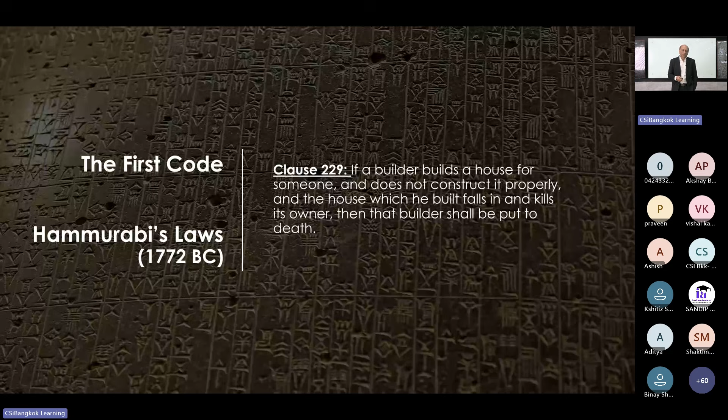As you can see, this is highly performance oriented. There is no excuse in this one - no excuse for design fault, no excuse for following the code, no excuse for construction fault. It's straightforward: performance, and performance not being met, and then the consequences. Of course these days we have better rules, luckily for structural engineers, but the concept is the same.

The reason we make a structure safe, we need to understand very well why a safe structure is essential. Of course we talk about the house not falling, but it's much more than that, because basically we are trying to prevent disasters from happening. Disasters are a combination of three important parameters or concepts: hazard, vulnerability, and exposure.

Hazard is what comes from nature or even man-made causes, and we have little control over that. Exposure is how many people will be affected, how many properties will be affected, what kind of industry might be affected - so that's the exposure, what is around that. For example, if an earthquake comes in a desert, it doesn't really matter how severe it is, because there's no exposure to anything.

But the important thing is vulnerability, which is the inappropriate built environment or the lack of resources for communities. Both of these are vulnerabilities: one is that the built environment isn't good enough, the second is that the community itself is weak and doesn't have the resources to do anything about the hazard. Once we combine these, this is the risk. So we are trying to reduce the risk, and because we cannot manage the hazard, we need to manage the...

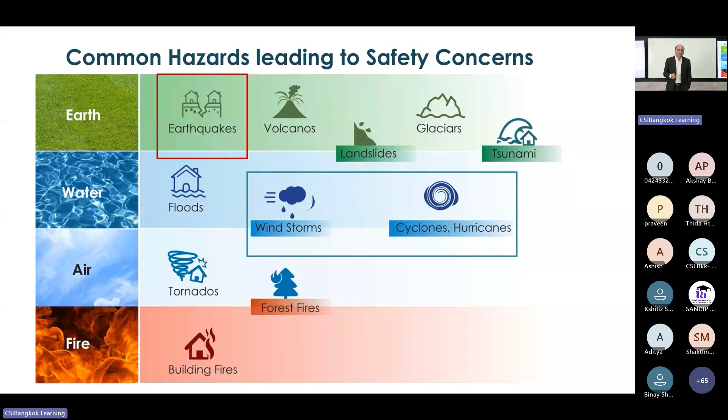So we're back. What I was saying was that we are going to talk about three primary hazards. Earthquake is the main one, and we will also mention wind and cyclones a little bit. Now, the progression of design, if you look at it from history, first of all was intuitive design, which we talked about, when the builder knew everything and the design was based on experience passed from one to the other, and no real computations were possible at that time, long before math and physics were developed. But then the building codes came in about 150 to 200 years ago, when we started to have formal computations or ways to compute structure.

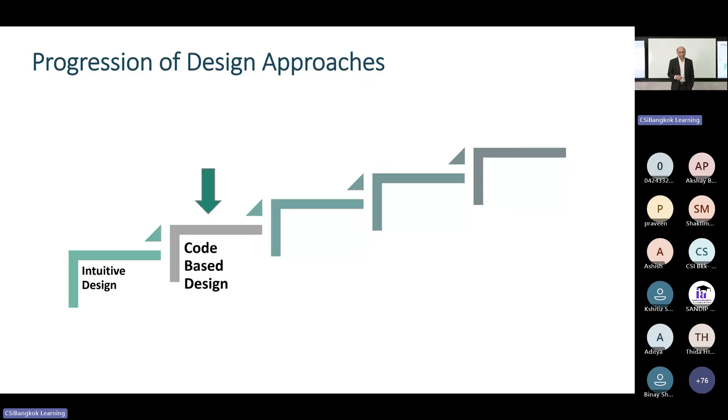As I was saying, the building codes were introduced, and then they started to create rules for designers to use. Now the role of the building code is very clear: they are basically trying to ensure public safety. The reason is because a lot of people are now involved in the building process - there's the architects, structural engineers, contractors, builders, and so many people. So they want to make sure that at least a minimum level of safety is ensured in all structures, because each engineer may have a different level of training. That's the reason to make uniformity and establish minimum standards - building codes are developed. They basically give acceptable solutions, prescribe the details, how to use those rules. They also give you exactly what formulas to use and so on, and they impose a lot of limits.

Normally, building codes are developed from research and also from practical application and experience. Now, the intent of the code, or the spirit of the code, is very clear - they want to give safety. The intention is that if you follow the code, you should get a safe structure. Not must, or you will, but you should get - so the intent is to get a safe structure if you follow the code, that's the spirit. But whether we really get a safe structure or not is not verified. After you design, you normally just finish the design and continue, but you never actually know whether the structure you designed will actually be safe or perform as expected. And that's the issue that structural engineers are grappling with.

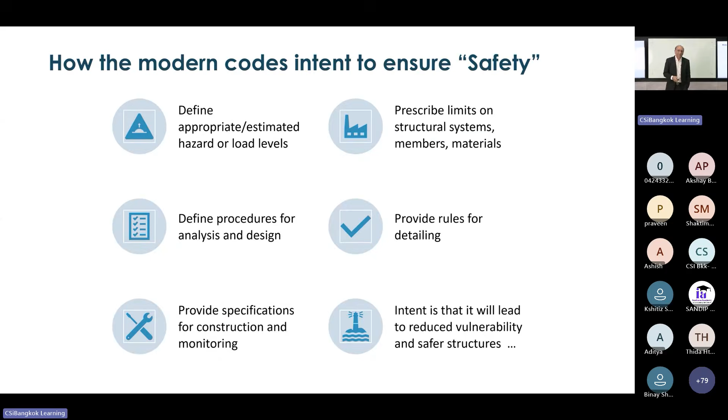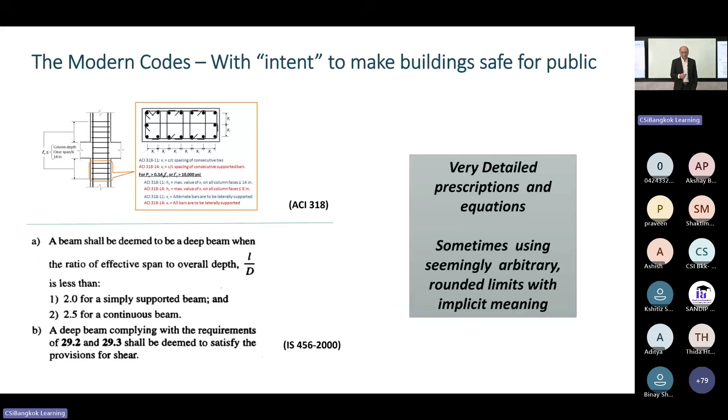Now look, for example, at some of the provisions - you get the limits, the spacing of the bar diameter, spacing of the stirrups, and so on. Very detailed, but very prescriptive. The limits are mostly rounded up, arbitrary limits on everything. But still, the intent is good behind this, although the implementation may have drawbacks. Ultimately, the problem is that engineers shelter behind the codes, because they cannot answer the question that I asked earlier: will the building be safe?

They can only say that I follow the code, but they cannot say that the structure will actually be safe or not, because they haven't checked that particular structure. They have just followed the general procedures for the code, which are maybe developed elsewhere or copied from some other design codes and so on.

So the problem is there are many other questions that the owner may ask. Most of them cannot be explicitly answered because we haven't done the real evaluation, and we will come to that in a minute.

So let's look at the design for safety against seismic effects using the American approach as an example. Other codes are very similar, and see how they handle the earthquake.

So first of all, if you look at normal loading, for example wind, dead load, live load, normally they are estimated and then multiplied by a load factor to bring them to a design level, 1.3 dead load, 1.7 wind, or whatever. So we raise the loads up and bring them to a design level where we think is the yielding point of the structure. Earthquake is opposite.

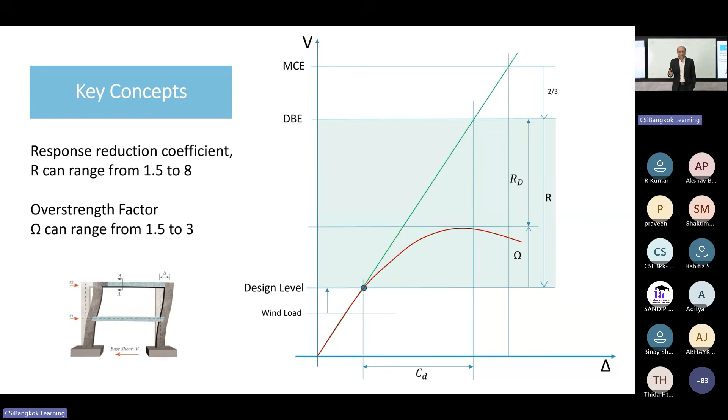But performance-based design does not do this. It takes these factors out and tries to estimate the actual red line.

Once we have done the traditional design based on the factors, then we look at the capacity and demand. For example, for moment, we say that the capacity should be greater than the applied moment with some factor, which in ACI is phi. In other codes, it could be gamma and so on. Then we say this D/C ratio should be less than 1. So the codes are very straightforward: less than 1 is safe, more than 1 is unsafe.

But actually, in a real structure you cannot decide exactly, because the factors vary so much. So this value could be anywhere, and still the structure could be safe or unsafe, depending upon how we choose those factors in the beginning.

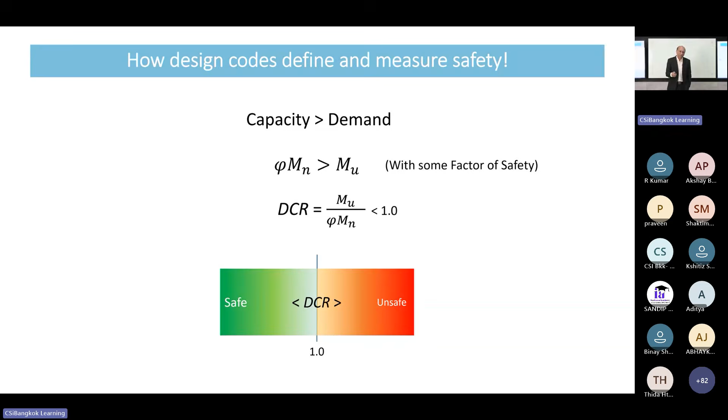As you can see here, to reach the Mu, or the demand, and reach the capacity phi Mn, there are many steps in between which involve so many factors, so many calculations, so many assumptions, before we reach demand over capacity. And that's the way the codes are set up.

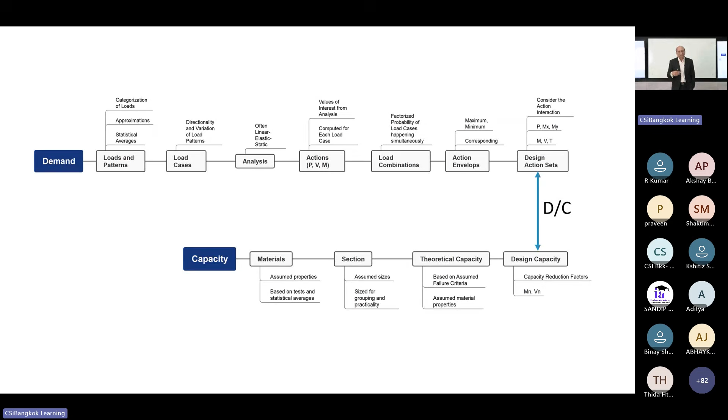We just let the demand and capacity fight with each other, taking everything out. No phi factors, no gamma factors, no omega factors, no R factors.

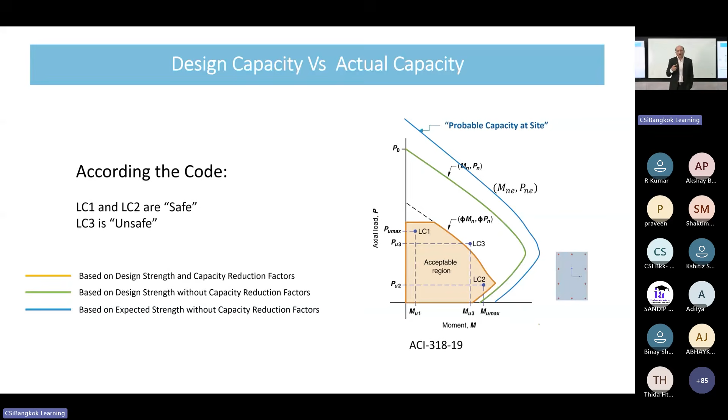Which means that we are away from the probable capacity, far away, but we don't know how far that is. So then comes the performance-based design.

From the code-based design, the next step on the ladder is performance-based design. And I want to make it very clear what is the difference. When I was starting my career, more than 40 some years before, at that time...

When you want to specify the concrete, we used to write the value of cement, sand, and aggregate as 1, 2, 4, and specify in the specification that the contractor will mix the concrete in this way. And then we expect that this will give us a strength of 21 MPa. But once we do this and the contractor follows 1 to 4, the contractor is relieved of responsibility for this strength, because we say just take 1 cement, 2 sand, and 4 aggregate, mix them together, and once he has done that properly, he doesn't care about the strength. We cannot catch him on strength, because that's what we specified.

But these days, we specify concrete based on the required strength, and the contractor or the material supplier or concrete supplier needs to deliver that concrete on site. If they don't deliver that strength, they have to bear the cost. So we have gone from prescriptive to performance in terms of concrete strength definition.

The same thing is happening with the whole of the structure. So now it is more about performance and less about conformance. We say we don't care how you make the concrete, whatever mix you use, it's up to you, just give us the strength. Same is true now for structures: give us the structure which has a certain performance. What factors you use, what material you use, how you do the analysis, what system you use is up to you, kind of. Of course, we don't have that much freedom, but ultimately we are required to prove that the structure is either operational...

...or it can be occupied immediately after the earthquake, or it will be safe after the earthquake, or it might collapse. So we have to work for collapse prevention and immediate occupancy as two levels, and of course life safety is in between. The estimated damage between those varies from 0 to 99% or 100%.

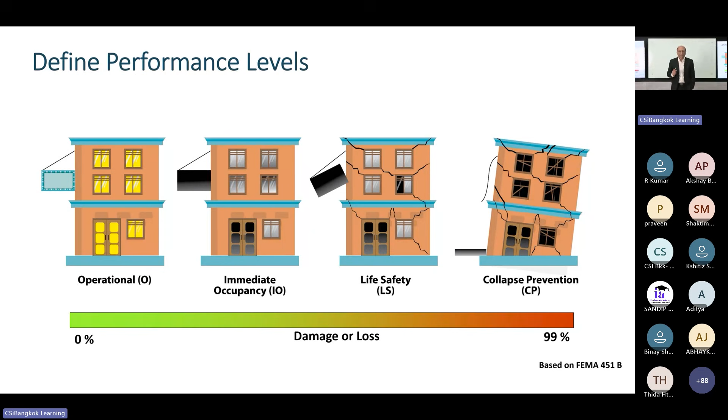And we have seen that a structure can actually collapse fully, as in the recent earthquake in Bangkok, where a building completely collapsed. So we did have complete collapse from an earthquake. It's not unthinkable, it's thinkable for that to happen. And so many buildings collapse, actually.

The second problem is that prescriptive specification constrains innovation, because you cannot innovate if you are supposed to follow the procedure. There's no room for innovation, but performance indicators liberate innovation. You can do whatever you like as long as you meet the required performance. So the codes have this arbitrary implicit design level in between, which is not real, because at this level we don't know what the structure performance is: immediate occupancy or collapse prevention.

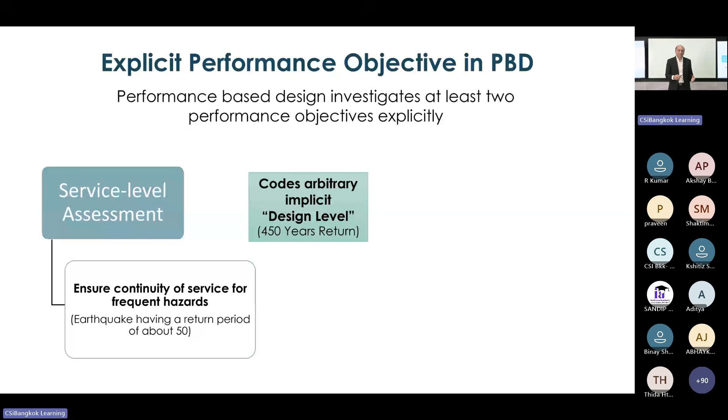So it's somewhere in between. But what we want is that the structure should not crack. It should be completely serviceable for a certain level of earthquake, which is service level assessment, for earthquakes that happen quite often in the life of the structure, 1 or 2 times. And it should not collapse for an earthquake which will happen rarely or in any case. So those are the 2 sides that we should check and confirm explicitly, and that's what performance-based design does.

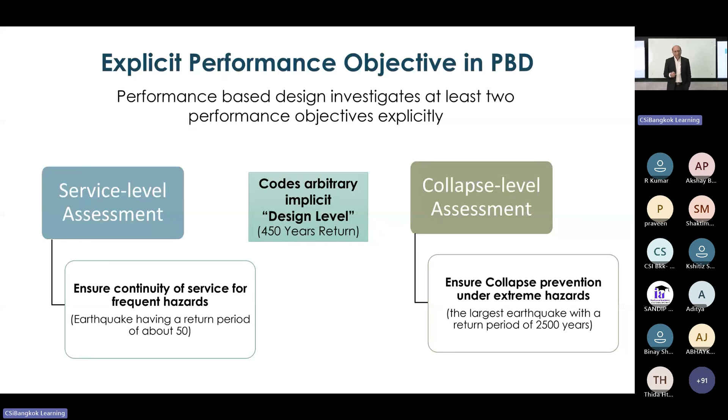So now if we do that, the owner has very clear control. Will the building be safe? Yes, we can tell him, for this earthquake, this level, this system, it will be safe and serviceable. Can I use the building after the hazard? Yes, if the service level performance is satisfied, then for a certain earthquake it will be usable. How much will the repair cost, depending on where we are on that graph I showed you, and how long will it take to repair, we can also estimate. So the engineer can answer most of these questions. That's the idea behind it.

But because the engineer has a lot of freedom, we still need to make sure the engineer is qualified, number one. Secondly, the design is checked, performance is reviewed by somebody who is equal or higher qualification or experience than the engineer. And there are guidelines to follow this process, not codes, but guidelines to help the engineer, because it's complicated stuff.

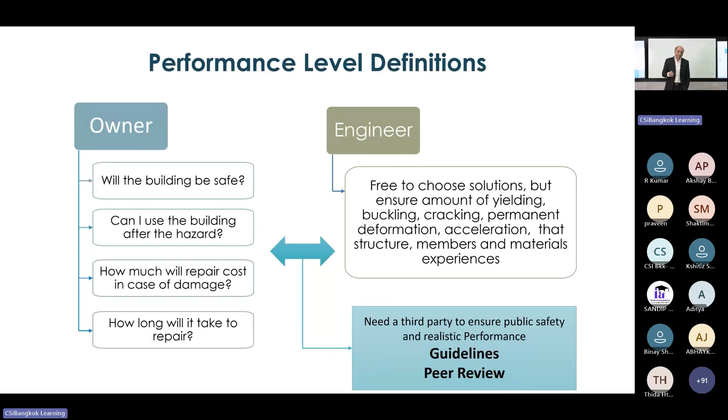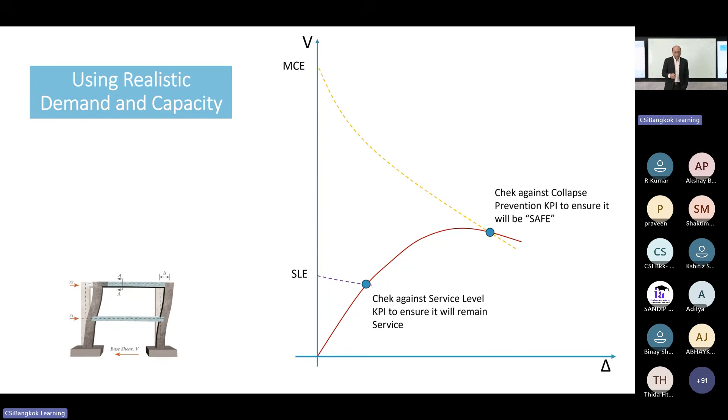So now we just have the red line, the actual performance, and from MCE we directly go to the performance for collapse prevention, and for the service level we go to the performance at the immediate occupancy or no cracking level. So we can just directly go, and all R factors, omega factors, everything is gone. That's how performance-based design is supposed to work if we do it properly.

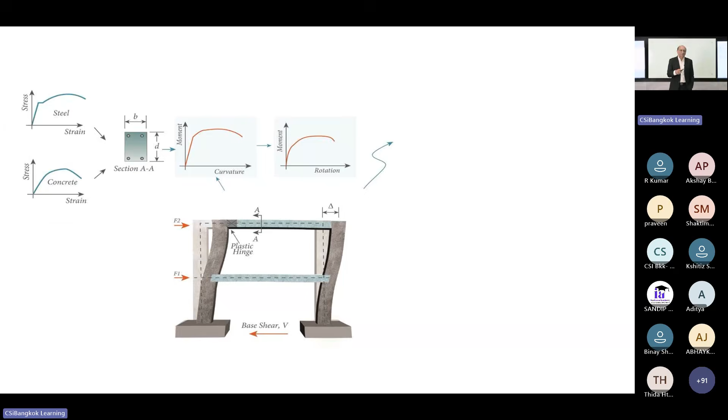And this is the procedure. If I can summarize it very briefly: you take the materials, nonlinear properties of steel and concrete, including confinement and all, you put them in the cross-section, you generate the nonlinear response of the cross-section, like the moment curvature, you convert that into moment rotation, you create the nonlinear hinges or nonlinearities in the structure. Then you determine the realistic site-specific hazard, not the one given by the code, but you actually find out, and I will talk about that in a minute.

You do the nonlinear pushover analysis or nonlinear time history analysis, and then you satisfy the key performance indicators, and then you get a realistic performance evaluation. So that's the overall scheme that we use for performance-based design. Of course the actual one is far more complicated, but the concept is here.

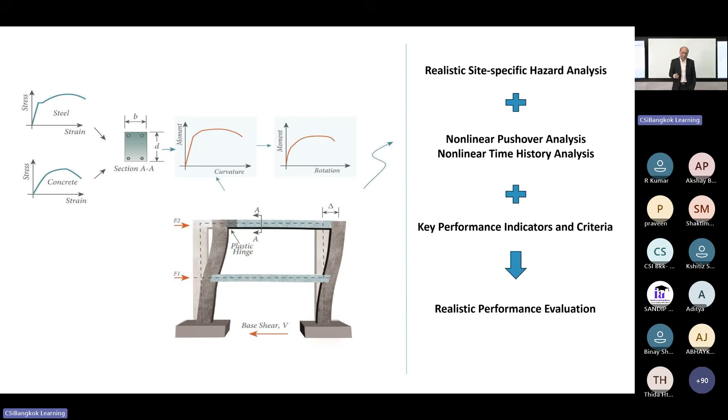And we can do this for a simple frame like this. And then we can plot the hazard and the performance together on one graph, the blue line coming from the performance that we did, and the indicators on the hazard on the vertical side. Then we can see whether the disaster will occur or not, and what will be the level of vulnerability and disaster at different locations of hazard and performance level or displacement. So this is displacement control mostly, plus force control for some components.

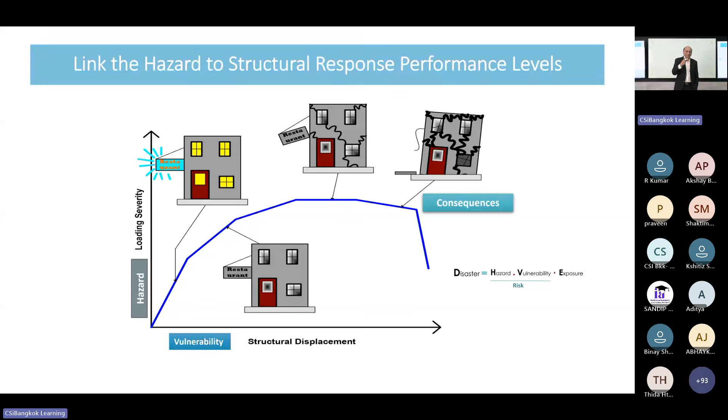Now these are the 10 indicators that we can check, and I will show you how they're checked later: stiffness, stability, strength, deformation, drift, ductility, damage, damping, energy, and acceleration. We check each one of them one by one to ensure they're all okay. Once we have verified them all, we have a lot of information about the structure, and we can answer a lot of questions that code-based design will not answer or may not answer.

So the code is then no longer a shelter, and performance-based design and performance-based evaluation can answer the questions we were asking earlier, because now the engineer has done a detailed nonlinear dynamic analysis with the real material strength, real hazard, with the real structure, removing the factors out of that.

So that's the idea. Let's see what the considerations are for performance-based design, going into the detail. Building codes are prescriptive, and performance-based design has flexibility and innovation. We already talked about how prescriptive codes presume that it will be okay, but performance-based design needs to show that it's okay. There's a big difference between the left-hand and right-hand side.

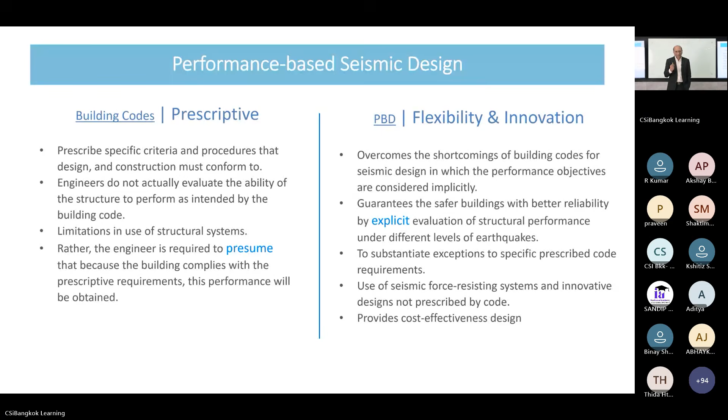This is, for example, a page from the ASCE, which limits the structure types. It says that if you're using a bearing wall system, you can only go up to that height. If you want to go higher, you have to use a system with shear walls and frames coupled together, where frames take 25% of the capacity and shear walls provide 75%. Then you can go higher.

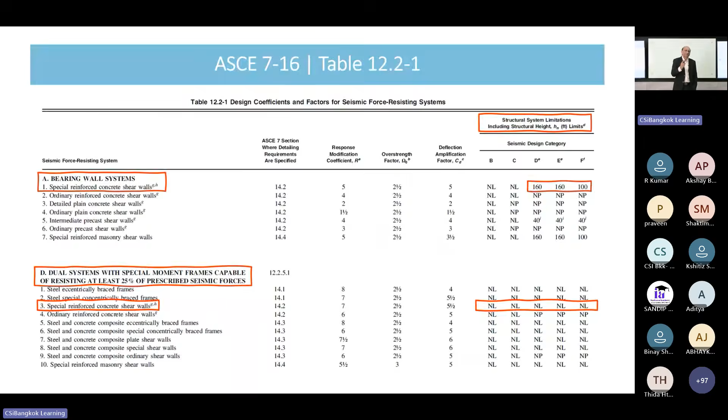So basically, if you are building like this, the code-based design will require that you must have the beams or a frame connecting to the shear walls, carrying at least the capacity to carry 25% of the lateral load. Whether you need it or not, it doesn't matter - you are required to do that. And then the walls should have the capacity for 75%.

In a tall building, this is almost impossible, because in a tall building, the frames have very few columns, very few beams. They don't have the capacity to carry 25% of the lateral load - they only have maybe 5 to 10% or less. But if you want to use the code, then you have to increase everything to follow that requirement.

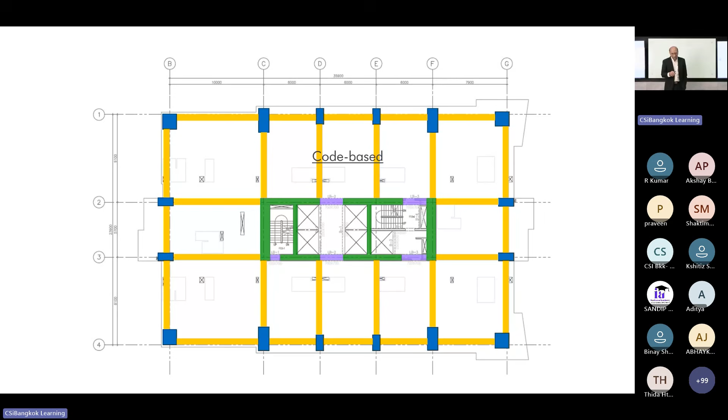But if you use performance-based design, you can just simply use a flat slab, no beams, and say, okay, I'm going to use a core wall, columns, and a flat slab. The core wall can carry all of the loading in this particular case, if we can demonstrate that. That's the advantage of performance-based design, and that's why so many tall buildings these days in earthquake zones are being constructed with only a core wall and no beams or frame.

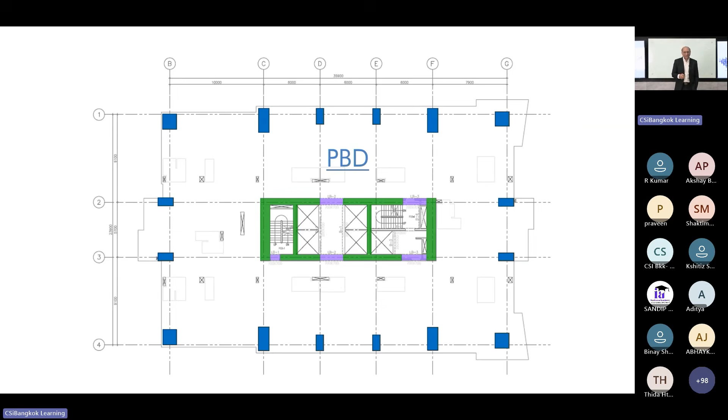So code-based design will require that, and performance-based design can prove that this can work as long as we do the whole thing properly. That's one of the biggest reasons why performance-based design can be used for tall buildings, but for low-rise buildings, similar things can apply.

The other one is the omega. The code requires that some of the important members, like the inclined columns or the diaphragms, must be designed for an omega factor of 2.5 or 3 or whatever - the over-strength factor. That means the forces that you get from linear analysis, you need to multiply by 2.5.

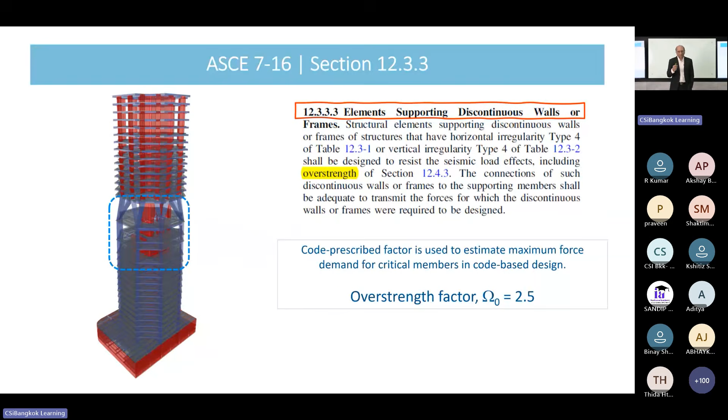But if you use PBD, you don't need these factors. You design them for the actual forces that you obtained through nonlinear analysis. So that's the second one.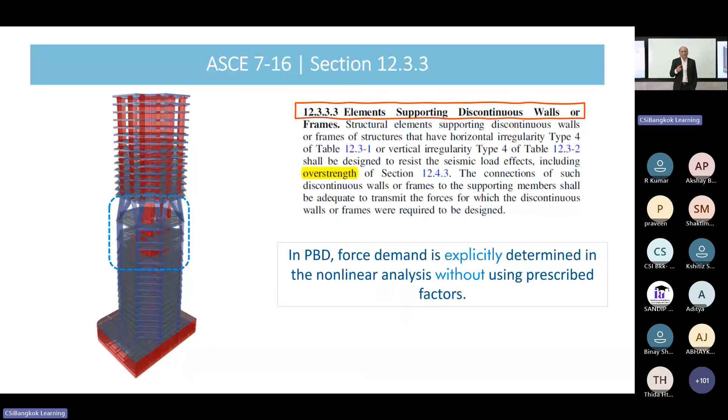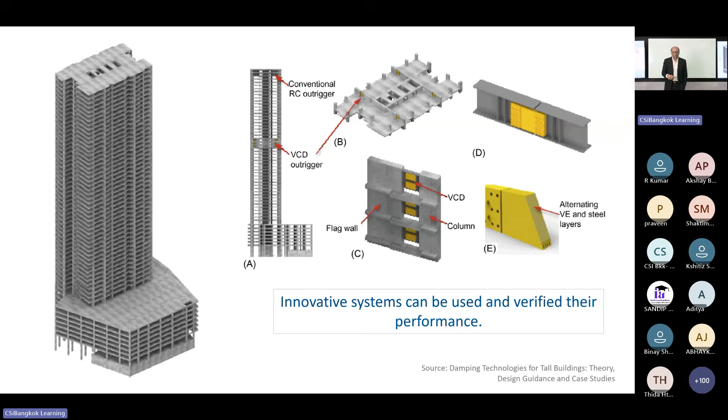The third one is that it allows you to use all kinds of things in the building that the codes do not have any way of handling - for example, dampers or outriggers, BRBs, viscous dampers, and many other things. So we can innovate in the building as long as we can prove that the system will work. That's the key advantage of using performance-based design.

The next very important one is the requirements for confinement and ductility. The codes will require that you confine the walls like this a lot - boundary zones have to be confined all the way, along the full height.

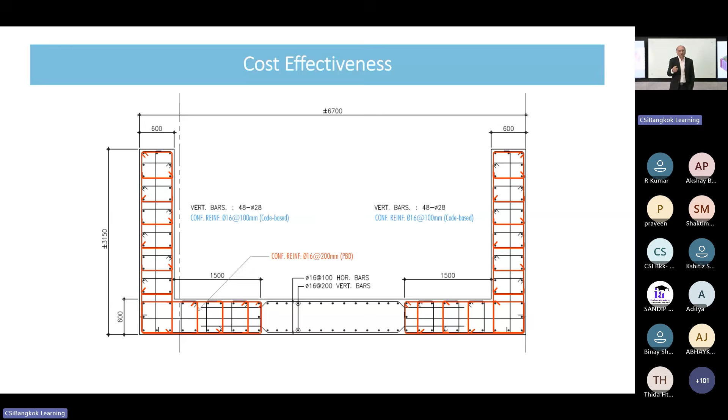But in practice, if you use performance-based design, you can actually reduce the confinement, because you can prove that lower confinement will work. So considerable savings can be done in terms of confinement if we can see that we don't need the full confinement over the whole height, because some locations are not yielding, so confinement is not needed there. That's another big advantage of performance-based design.

So what do we need to do this? First, the basis of design has to be defined. Then the geotechnical investigations have to be done properly, more thoroughly than the normal one. Site-specific hazard has to be determined - we cannot use the map provided by the building codes because you're not using the codes anymore.

Also, wind tunnel testing has to be carried out for tall buildings because wind demand interferes with the seismic design - we will see that in a minute. For low-rise buildings, the last one may not be necessary.

So let's look at the site-specific probabilistic seismic hazard assessment.

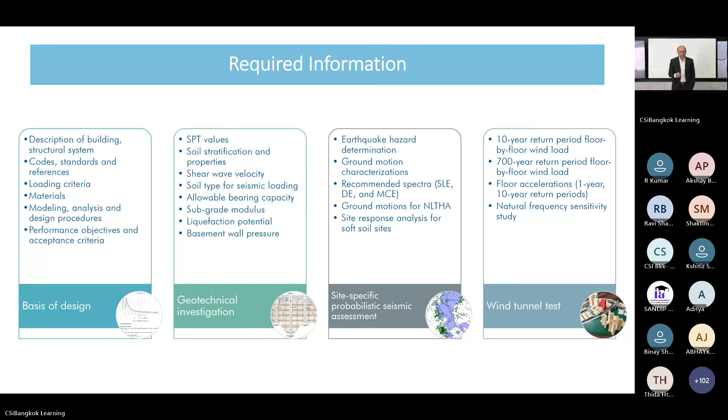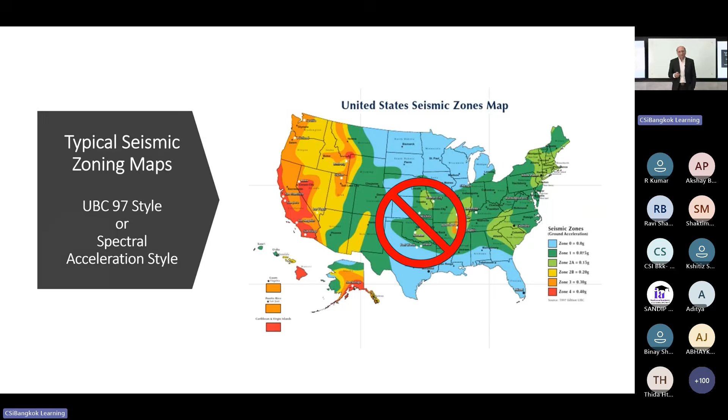So this is a typical zoning map, UBC 97 style, where we have zone 1, zone 2. Of course, they don't use it anymore. They use spectral acceleration, short period, long period. But I'm just giving you an example because many countries still use zoning to define the risk or hazard. This is no longer an acceptable way to do things in performance-based design.

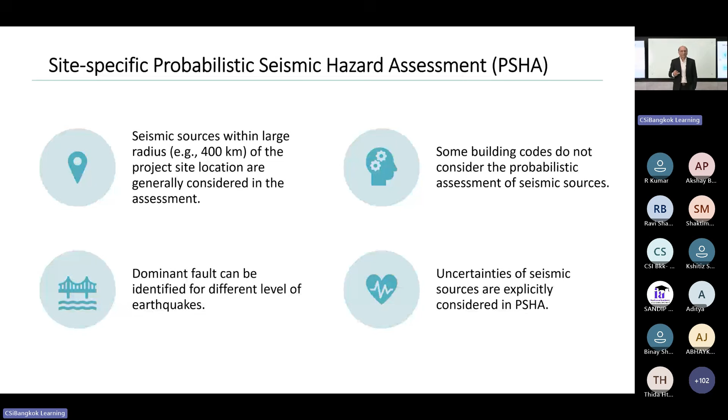For that, we need to actually calculate the expected hazard at that site using all of the faults and sources of seismic excitation, their potential for all of the energy to be released and so on. So the whole analysis is done, and then we also find which is the dominant source, so we can see what is the direction of the fault, because that's also important. Which direction the earthquake is coming and which direction the building will respond.

So after that, we need to get at least 2 levels of response spectra and corresponding time histories. One for the maximum considered earthquake, which is roughly 2,500 years return period, used for collapse prevention performance. And then the service level earthquake, which is a 43-year return period. So if the building's life is 100 years, it might come twice, roughly. And the other one is a very high risk. This one is where the building needs to remain serviceable.

Look at the damping. The design basis earthquake and the design codes normally recommend 5% damping to be used. For SLE, the damping could be as low as 1.6%, because the service level demand is too low, so cracking would not occur. So the building will be in a more or less uncracked state. So the damping will be low.

And for MCE, the damping could be higher, and that varies depending on which specification you use. Sometimes they use 2%, sometimes 5%, and so on. So for service level, the damping is pretty low, and this has a major effect on the demand.

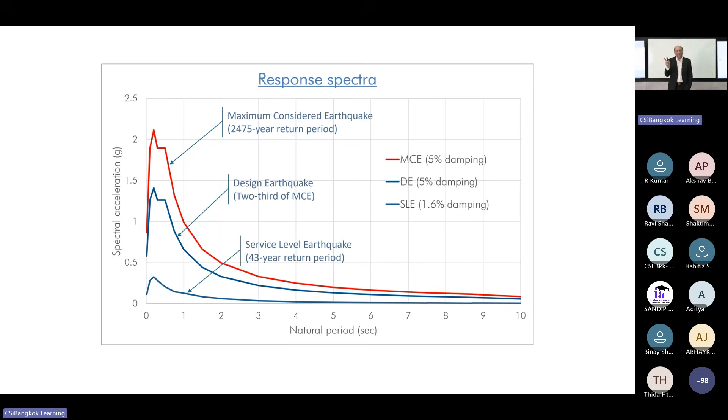And then the fault orientation is important. We design, when we model the buildings in ETABS or any software, we think there's an X and there's a Y. But there is no X and Y marked on the ground. It is our assumption that this is the X direction, this is the Y direction of the building. But in reality, the building will be placed north-south with orientation with respect to north and south. And then the fault will have a certain direction. So seismic demand will come along and across the fault, normal and along.

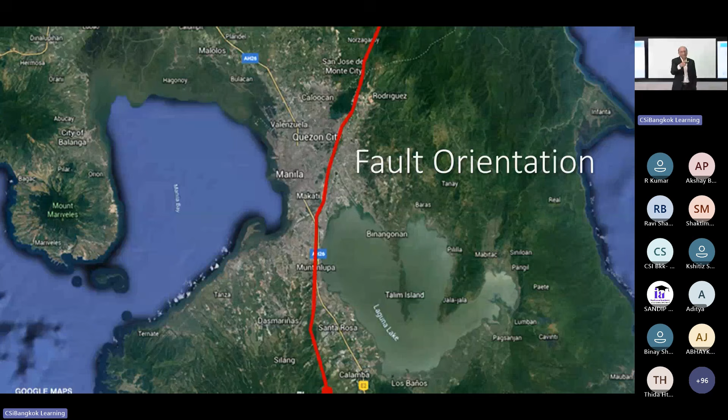So we need to design both for the effect of the earthquake which is along the fault, parallel to the fault, and the effect of the earthquake which is normal to the fault, once we determine the predominant fault. This is in Manila, for example. So if you do that, you'll have to orient the X-Y on your plan or ETABS with the north-south and the fault direction to find the predominant direction on which the building should be, or the seismic demand should be applied, or the hazard should be applied. So you need to input that data into whatever software you're using to make sure that the direction of the earthquake and the direction of the building's principal directions are aligned for normal and along-fault excitations. And this is critical.

Then for level of earthquake, we have the service level earthquake, as I mentioned, and the maximum considered earthquake. For service level earthquake, we check serviceability. Everything must remain elastic with a little bit of minor yielding. For collapse prevention, everything should remain standing with allowed deformation, yielding, lot of damage, but not collapse. Building may not be usable after that, but it must not fall down. So that is controlled by limits on deformations, as well as on shear in certain members.

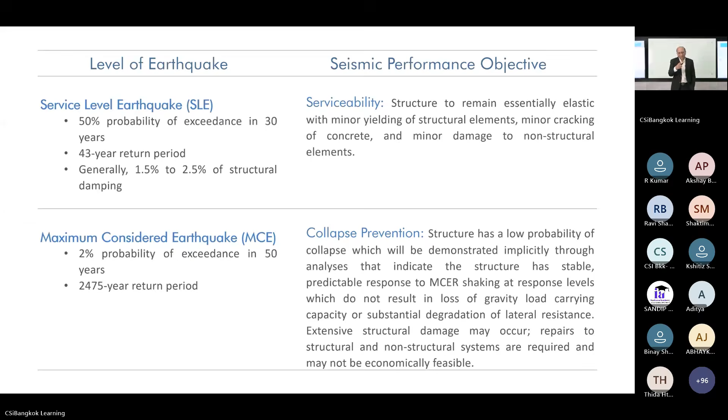So you can see here that the damping is now controlled. Service level damping is controlled. 5% damping is for design level normally. MCE is 2.5 in this case, and then SLE is 1.6. So we control the damping now, different from the code design, because we expect the real structure not to have that much damping, and change of damping, as you know, changes the demand coming to this response spectrum, goes up and down based on that. So these are the critical things, and this depends on the height of the building and so on. It's not a single number that can be used. So this has to be estimated properly.

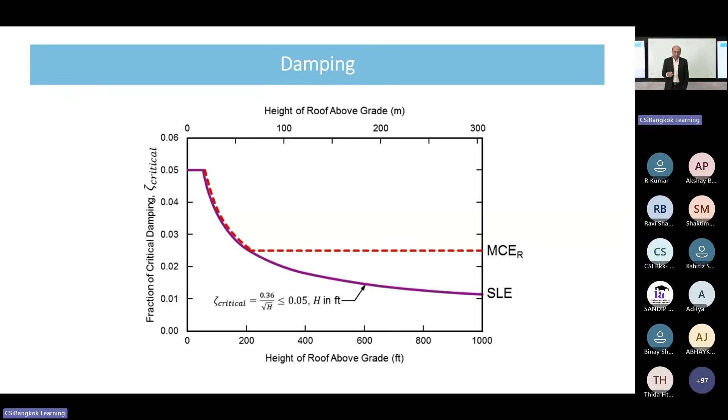So how do we conduct the performance-based design? Many of these slides I have taken from AIT Solutions presentation. Engineer Ong may also be joining today, he will answer some of the questions. A lot of the work is based on buildings which have been evaluated by AIT Solutions at AIT, and we have borrowed some of these slides from them.

So the performance-based design procedure is: geotechnical investigation, probabilistic seismic hazard, then selection of the design, schematic design of what system we are using, then wind tunnel for tall buildings if that is the case, then elastic design for wind, and nonlinear design for earthquake, and also elastic design for service level earthquake. So we can see the whole picture is very clear, and we follow that for doing the complete performance-based design of a building.

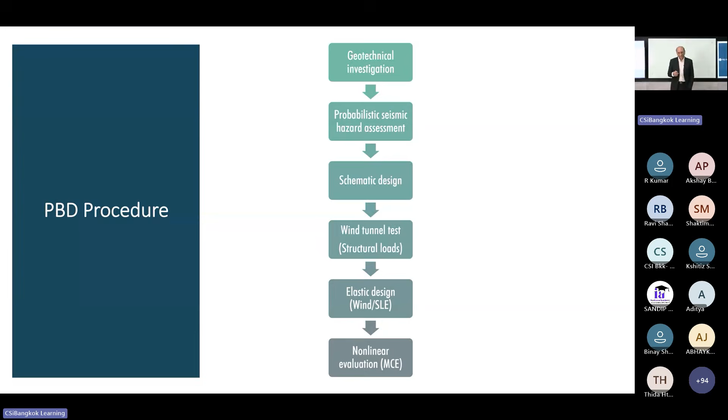Two levels are checked. The design level is not necessary. So for modeling and analysis, for the service level evaluation, we create a linear elastic model. We use response spectrum analysis. We consider critical damping, generally 1.5 to 2.5%, like I showed you, it's a range depending on the building. Load combinations are very clear.

We do not multiply the earthquake anymore because it's already service level actual loading. And then all of the factors, R, omega, and others are taken to be 1, so they are not needed in this analysis.

Acceptance criteria is clear. The DC ratio should be less than 1.5 for deformation control and less than 0.7 for force control, so we don't want any kind of shear failure, axial, or brittle failures. The story drift is limited to less than 0.5%. These are the acceptance criteria to ensure the building will remain serviceable after that service level earthquake, and it can be occupied immediately, so people can leave and come back after the earthquake.

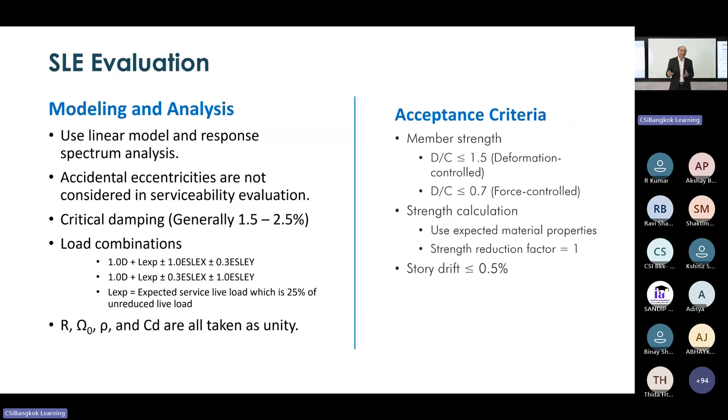The MCE level, however, is more complicated and comprehensive, because we use a nonlinear model and nonlinear response history analysis, either pushover or full nonlinear time history. If you're using response history analysis, you use 11 pairs of ground motion, different, considering various hazard types in terms of near fault, far fault, and so on, so we make sure we consider various types of time history characteristics that could hit the structure.

The damping is less than 2.5%. We take the average of these 11 ground motions to calculate some of the things, and for some we use the average multiplied by a factor.

Then we classify the actions to be either linear or nonlinear. The brittle actions, for example, are expected to remain linear, and the ductile actions are expected to be nonlinear. So we classify them, and this may depend on the guideline that you're using, and may have to be agreed with the people who will review the design and so on. But normally this could be one of the things that we set up.

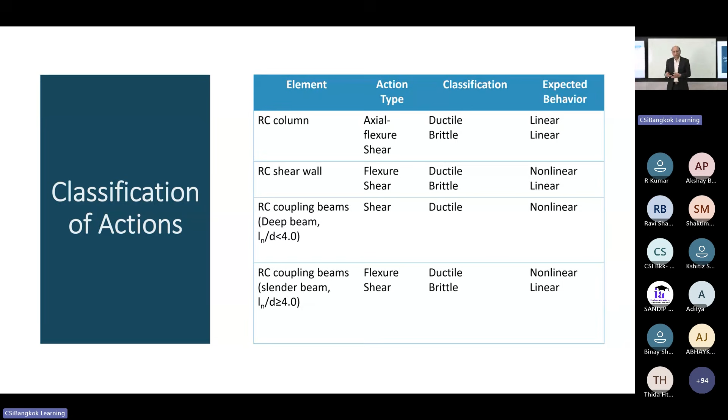As you can see, some things are allowed to be nonlinear, and the limit is on deformation, and things which are brittle, not allowed to be nonlinear, we check the force. So for things which are deformation-controlled, we check the deformation at various performance levels, making sure rotations and deformations are within a certain range specified by the code. For force-controlled elements, we make sure they do not cross their failure point because there's no ductility. Those are the two backbone curves used to control the response or check it after the analysis is complete.

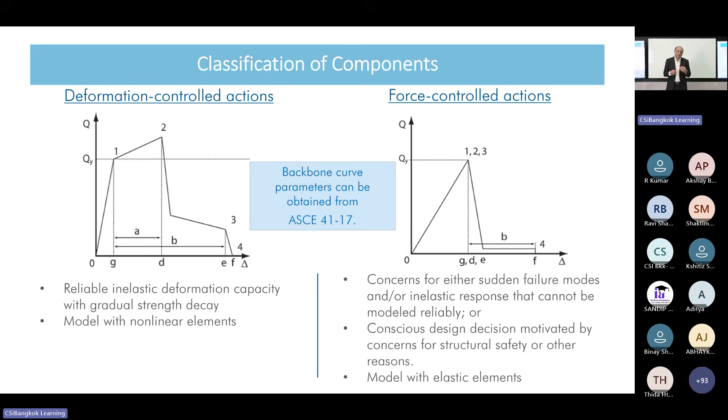Normally, for a nonlinear time history, you will have the stresses, but we use the backbone curve already modified for damage. So we use that modified backbone curve, check the rotation against moment, and make sure it is within the limits.

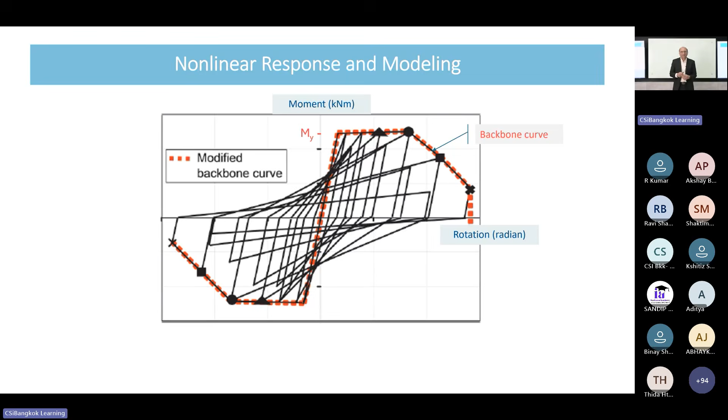Now, in this case, we have to include the confinement effect in the nonlinear modeling. So for the portion which is confined, we use the confined concrete curve, and for the portion which is not confined, like the middle portion of the wall, we use the unconfined curve. So even the outside cover is unconfined and the portion within the zone is confined. We have to do detailed modeling using fiber mesh or nonlinear shell, whichever approach we use - there are many approaches.

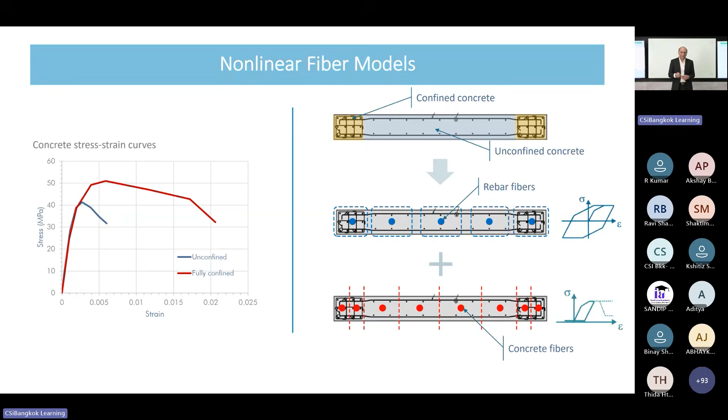We have to make sure we specify the correct model for concrete to take into account the nonlinearities and confinement effects. Once you have done that, we can check the response more reliably. You can see here the response from the two types of concrete.

So demand capacity ratio, there are two types. Like I mentioned, we have the elastic strength and we have the deformation inelastic. So we make sure that the two are satisfied independently of each other. Certain things for brittle, elastic limits, and for deformation limits.

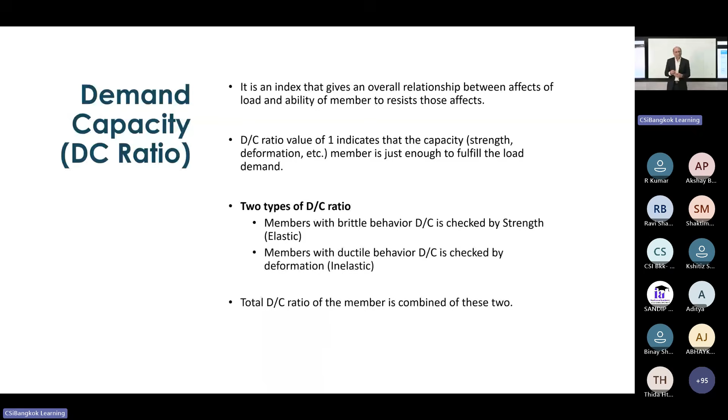And these are the acceptance criteria. For example, for the beams, hinge rotation has to be less than the limit. And then for columns, the axial flexural interaction, hinge rotation less than that limit. Shear DC ratio for strength capacity and beam shear less than the strength capacity.

So like I mentioned, for brittle, we make sure that the strength, we do not have brittle failure. So strength is the primary concern. For flexure, where we have the energy dissipation, where we have the nonlinearity stored, we can allow more deformation.

And same is the case with shear walls. We limit the tensile and compressive strains for the shear walls because the wall is modeled in such a way that your rotation cannot typically be measured. So we check the strains at various locations.

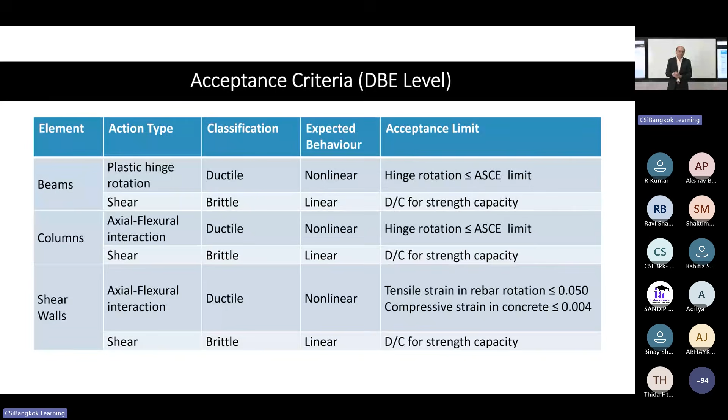And then we have the limits on story drift, 3%, and coupling beams and so on. So it's very important to set this criteria, agree with the client, agree with the guidelines, and agree with the person or engineers who is going to review the design. Everybody has to agree before we do this work.

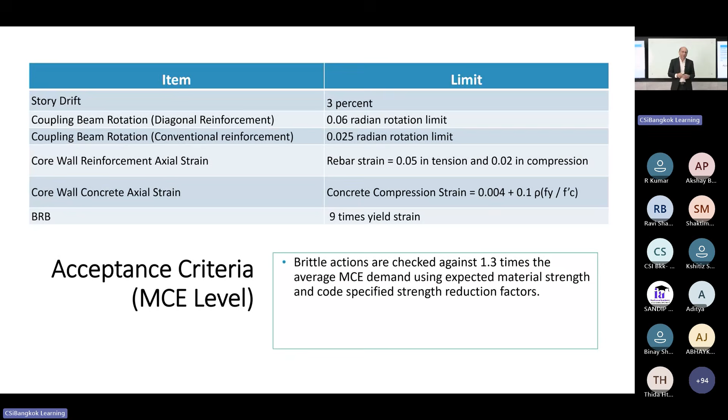Then we look for global and local responses, because now we are doing a very detailed model, very detailed analysis, so we know we have all the information that we need to make the right decision. And that information is a lot: modal analysis, base shear, story shear, building sway and displacement, story drift, shear wall strain, shear wall shear capacity, frame member rotations, and so on.

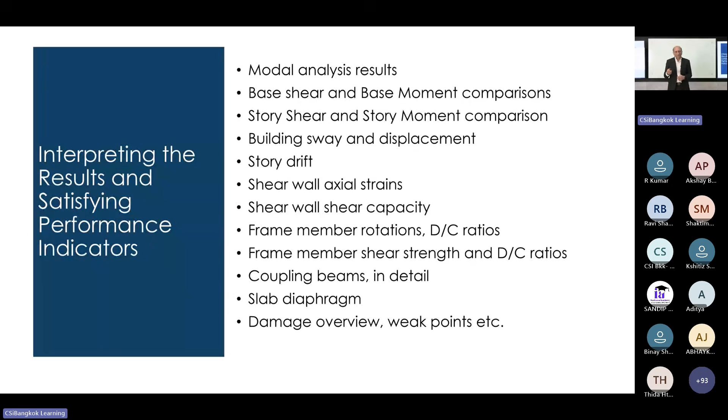So let me see quickly what we can. So first of all, base shear. Very important to check the base shear from different analyses. Normally, when we do the performance phase, we at least have a linear model, response spectrum, and we have a nonlinear model, so we can compare them.

We can also compare the wind demand there. We can also compare maybe pushover. So we can run many analyses on the same model. We can run linear response spectrum, linear time history if you want, nonlinear pushover, and nonlinear time history because the model is the same. And we can get all these base shear and compare them. And the percentage is very important.

And then we look at the transient drift, that means drift which will happen during the earthquake. And we also look at the residual drift, the drift that will be left after the earthquake is over, because the building may not come back to its original state. And that's why the ground motions normally have to run longer than the earthquake duration, to allow the building to come to a standstill.

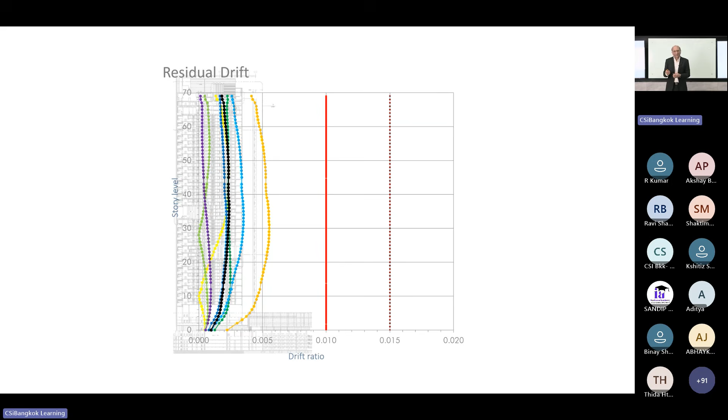So let's say the actual ground motion is 45 seconds. We may run the analysis for 2 minutes or so until the building comes to a stop, and then see what is the drift at that last point. So we check both the drifts. We look at the lateral displacements. We look at the floor acceleration, which is very important.

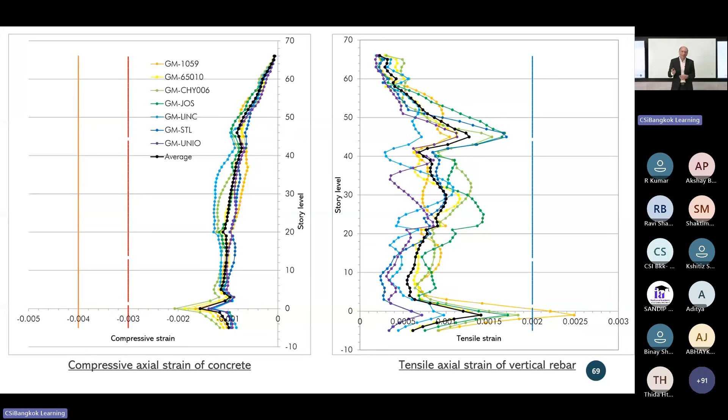We look at the strains in the wall, at different points, different ground motions, at all locations in the wall, compressive strain and tensile strain, to be within the limit. We allow some tensile strain to yield, but compressive strain should never crush.

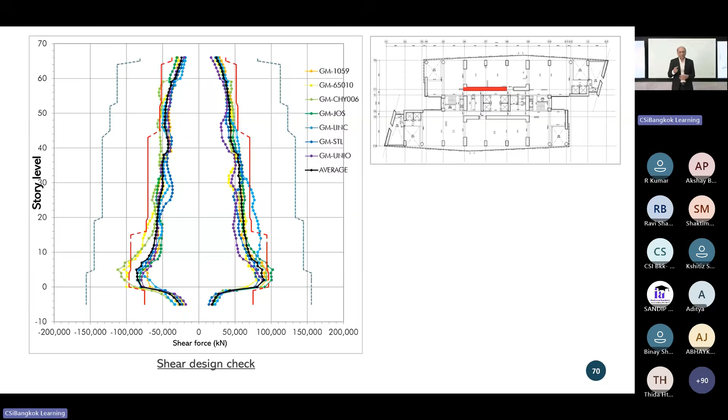Then we have the story level shear not to exceed the capacity, the outline. We have the coupling beam rotations, making sure that coupling beams stay within the rotation limit. And then we have energy dissipation, to see how much energy was dissipated by what element, because ultimately it's the energy dissipation which will hold the structure during and after the earthquake. So we check all of that, where the energy dissipation is going, and what percentage that is.

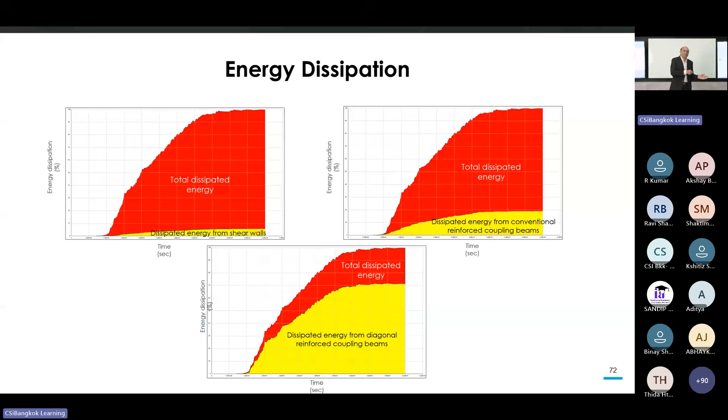So now you can see it's far more than the code requires. We don't just finish the design and stop. We go back and check everything to make sure that the performance is actually checked.

Second one is software. Very important, because the software you pick should have the capability to do this analysis. In general, Perform 3D is the gold standard for performance-based evaluation. Almost all people running performance-based design would prefer Perform 3D. And of course, now ETABS and SAP can also be used because they have similar capabilities. Perform 3D is more comprehensive in many ways, but also more difficult. ETABS can do the same thing, it's easier to use, but we have to learn both tools and see how they work.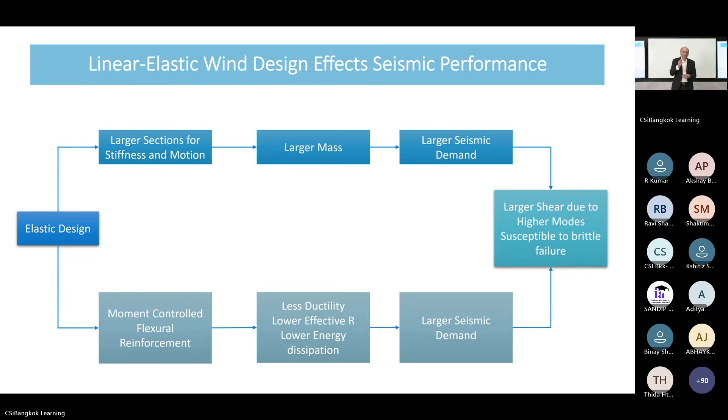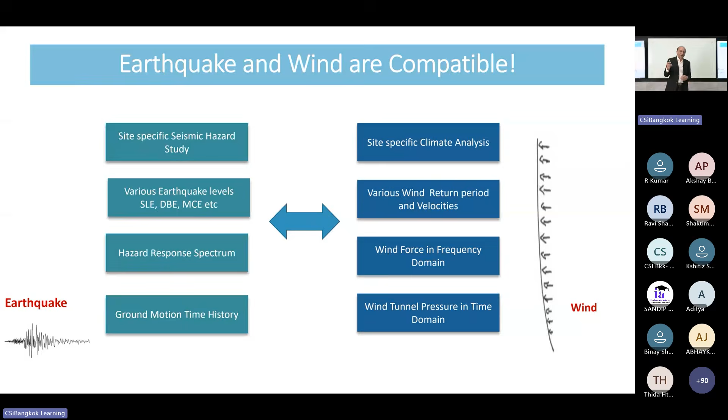So we should be able to do performance-based design for wind and earthquake in a similar manner. And that's what the future is looking at.

So Appendix A code is going seismic design up to performance-based. In 2025, wind is also going that way with the new code, as I mentioned. And then in appendix, we are also going toward resilient and sustainable structures. So codes are catching up on these approaches and trying to cover a broad range rather than only the code-based design used earlier, because so many people are now becoming familiar with these methods. The codes recognize that and are allowing these things to happen within the code boundaries.

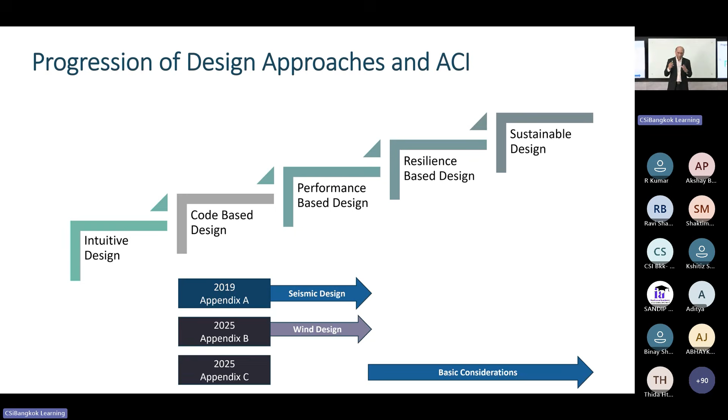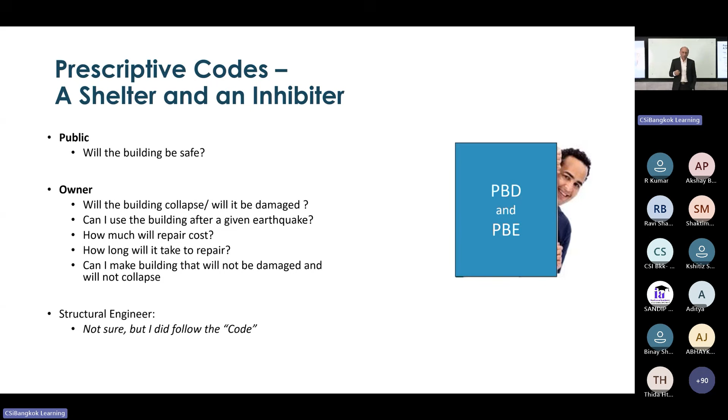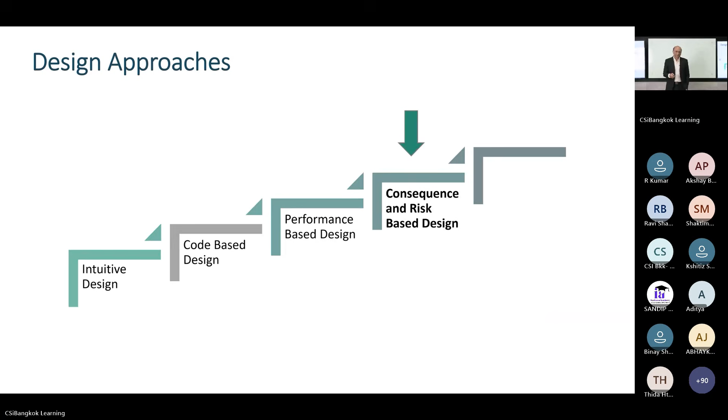So now codes recognize this and want to allow engineers to do more than traditional design. PBD and PBE are coming in, and codes like ACI Appendix A are saying you can do this also without violating the code. So we can move seismic design all the way to resilience-based design, and bring wind to performance-based and later to resilience design. Consequence and risk-based design, as well as resilience-based design, is something we'll talk about another time, but they're all derived from performance-based design as the next logical step.

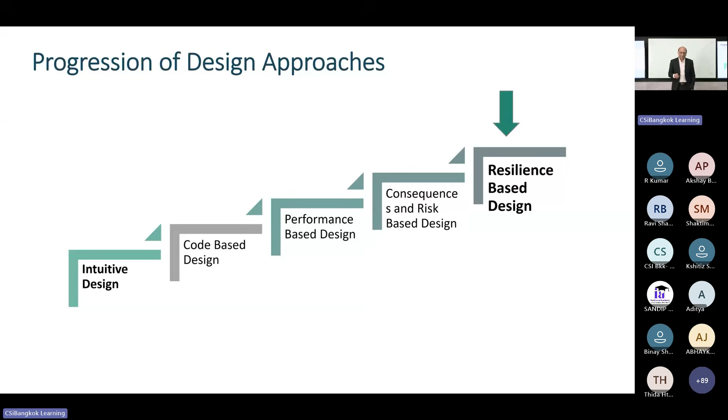So let's look at how the PBD process is typically managed at a higher level. Like I mentioned, first of all, we have to identify which project is suitable for PBD.

Generally, every project can be, if the seismic demand is high, if we're in a high seismic zone, it might be valuable to do that. We have to then convince the stakeholders that PBD should be done, because the building authorities, the client, engineers, everyone has to be convinced.

Then we have to form a PBD team, then select the appropriate guidelines, a lot of difference which exists, then set up the performance indicators and criteria, consultation between everybody, carry out the needed studies, geotechnical, hazard, and all. Select the right tools, very important once again, and then conduct the PBD.

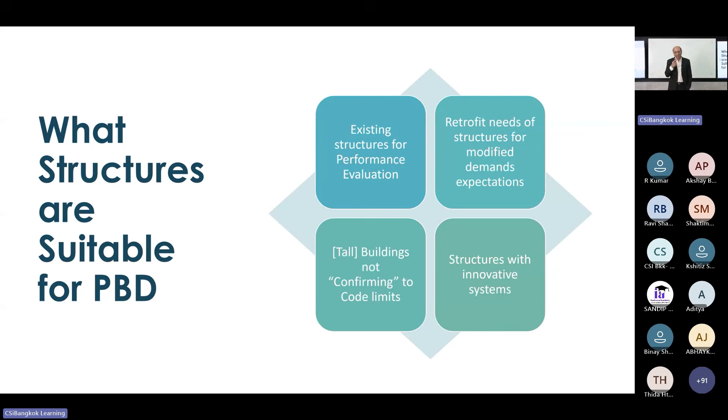So for existing structures, performance-based evaluation is very important because they're already made, so we cannot follow the code. We talked about that in another webinar. Retrofit needs can be reduced. Tall buildings not conforming to code limits can be designed, and structures with innovative systems can be designed. So this is some of the reasons why PBD can be selected.

And then very important to understand nonlinear dynamic analysis. We have been doing so many webinars on this subject because it's so important for engineers to be familiar - having the right information, having the right software, and an ability to interpret the results.

Tons of data will be generated, terabytes of information will be generated. How do you process? Just getting the numbers out from that output is a task. And then you need a lot of patience because it can take months and months to do this right.

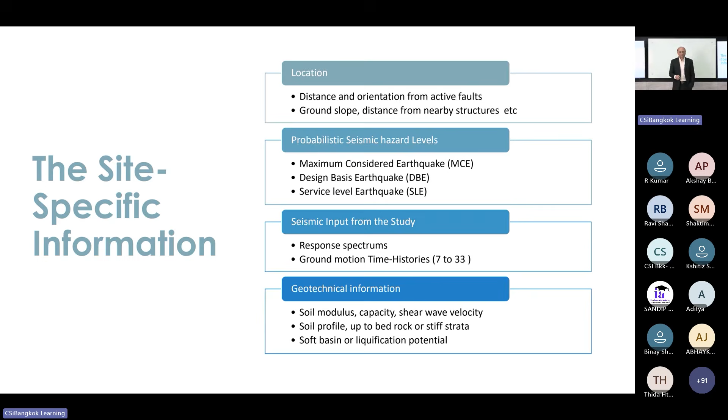So site-specific information, like location, probabilistic seismic hazard, seismic input from the study, geotechnical information, all have to be done. And then, in summary, we carry out the performance design, as more than just structural engineers' domain - it's not just a structural engineers' problem. It's everybody's problem. The client, the building authorities, the architect, geotechnical people, everyone has to be on board.

It requires extensive knowledge and ability to convince many stakeholders. And we, in AIT Solutions and AIT, we spend years convincing people to follow that. It needs additional site-specific studies, needs specialist consultants and peer reviewers, needs additional knowledge of nonlinear dynamics, needs special guidelines and tools, and needs skills, patience and understanding. So that's the summary of the whole performance-based design, as we talked about.

And finally, we need to keep the big picture in mind. The first one is, what is the purpose of structural design? We started with safety. Safety is, we have to make sure that we have disaster reduction because we don't want to have risk of disaster. How to achieve the design purpose?

That's what we talked about - you have to fix the performance levels. How to confirm that the design procedure is achieved, doing the nonlinear analysis and all of that, and checking everything that I showed you earlier. Then there are two more steps to that.

What if the design purpose is not achieved? What do we do? How do we fix it? How do we come back and improve it? And the last one, what should we do if the design objective cannot be achieved at all? Do we go back and change the system? What are the things that we could do if it cannot be achieved? Do we accept the risk, or distribute the risk, or what? So these are bigger questions in the whole process of the structural design.

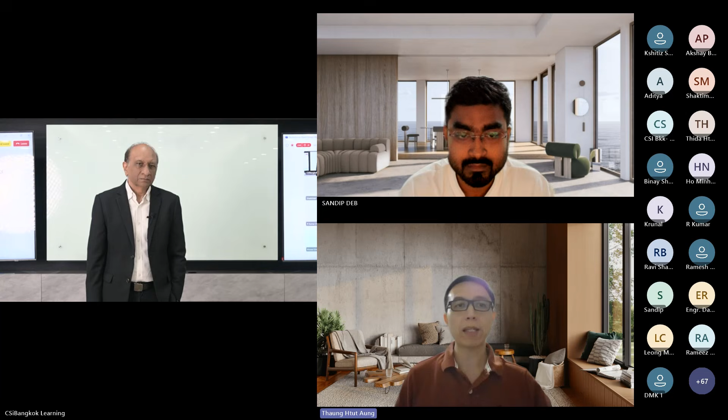One thing is the computational effort - it is very intensive compared to seismic design. For seismic PBD, we just run the ground motion at the base of the building, which may be 2 or 3 minutes duration ground motion, with maybe 5,000 to 10,000, 15,000 steps. But in wind PBD, we have to simulate at least a 1 hour typhoon event for wind time history. That wind time history also applies not only to one story - we have to apply it for the tall building across several stories. So the computational effort is very large, and handling the data is very big.

This is one thing, but ETABS can handle it. For Perform 3D, I think there is a limitation for the number of functions that you can apply, number of time histories that you can apply in the model. So you have to check if your wind time history and the program limitations are okay or not.

Thank you so much, sir. I think there are a lot of questions, but we are already... Can we take a few more questions, sir? There are a few questions, I think. Yes, yeah, we can take a few more, and then the rest you can send us, and then we can reply later. Yes, sir, sure, so I will take the last question for today.

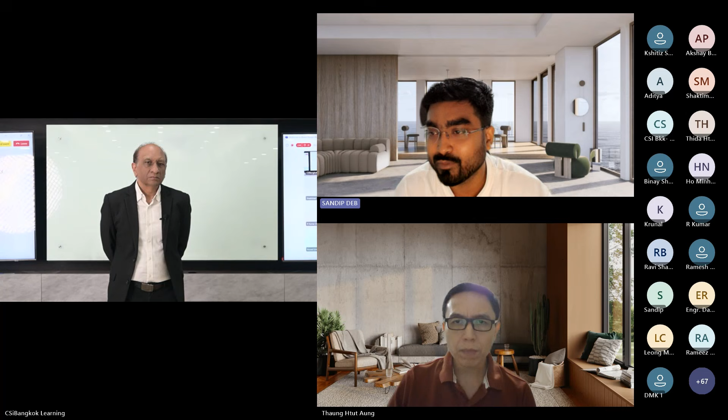For Y column, which type of analysis is needed for mitigating the torsion, and what should be maintained? For Y-shaped column, I think someone is asking - Y-shaped column, in the elevation or in the plan? So I think it is in the elevation for Y column. Yeah, it's in elevation, mostly.

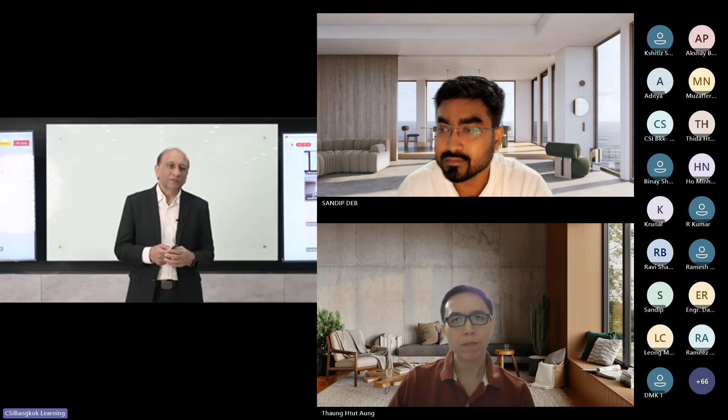I think the problem with any inclined column, and in Y also, is that they will act more like a strut and less as a column, and their control may be axial force control rather than bending moment or shear control as a traditional column. So I think any inclined column actually causes a severe stiffness change and nonlinearity change where they're used. They may have to be modeled using axial hinges, not only deformation, because most of the forces in inclined columns will be axial and much less bending moment. So the modeling - but most likely they should remain elastic. We should not expect any nonlinearity from the inclined portion or inclined columns.

Yes, sir. For the Y-shaped column in PBD, we have to consider the vertical earthquake effect. If there is an inclined column, we need to consider that. And another thing is at the joint of the two inclined columns and the bottom straight column, we have to consider reinforcement congestion and large confinement. So those things we need to take care of.